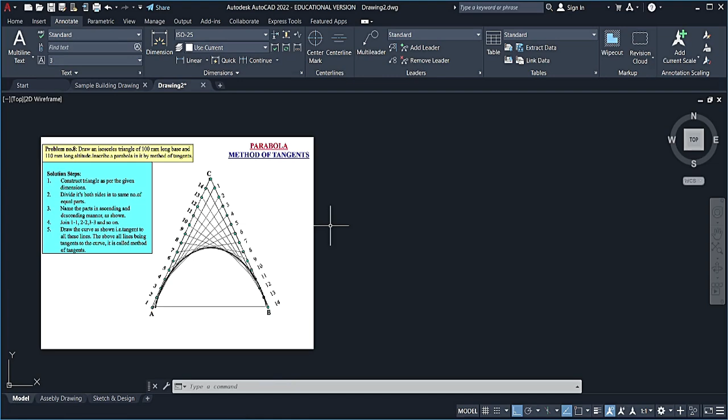Hi, so in this video I'll be showing you how to create or construct a parabola using the method of tangents. Now here to my left I have the questions for this task. It reads that you are required to draw an isosceles triangle of 100 millimeter base and 110 millimeter altitude. We are to inscribe a parabola using this method. Now here I have the steps and procedure on my left to create this parabola.

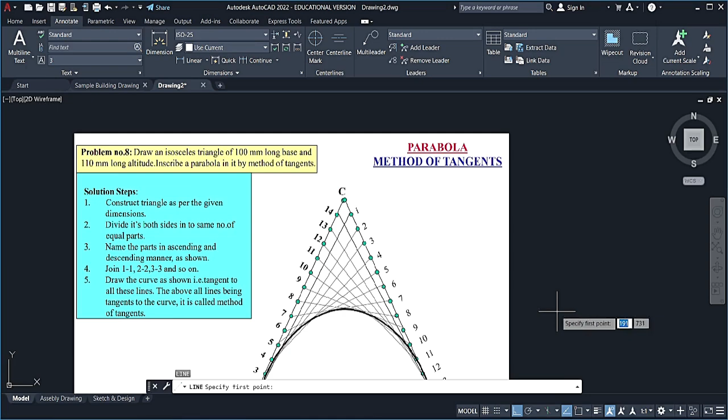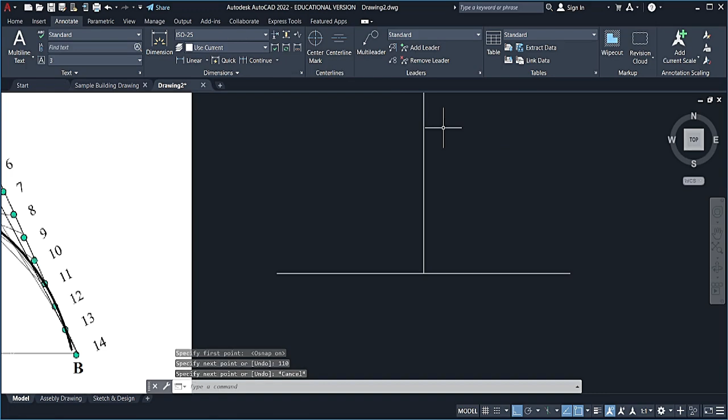Now step one for me is to start off with the triangle. So I'm just going to draw a horizontal line that measures 100. Then I'm going to draw a vertical line that measures the altitude, which is 110 millimeters, from the center. That's right here, 110. Now once I've done so, I'm simply going to draw a line through these points, from here to here and then back down to here. Now this one did not snap at the right location, so I'm moving it to where it's supposed to be.

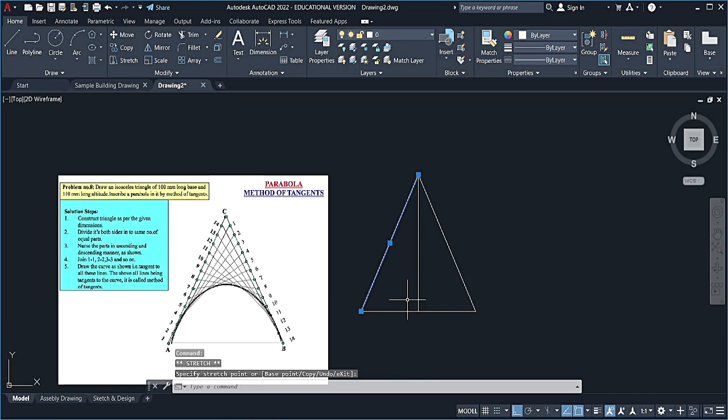Now I'm going to label my points using my text tool here. Click, draw my little text box. Now this letter is going to be C. Click out here. Now it's a bit small, so I'm going to increase it by doubling the size. I'm just going to scale it by 2, and then I'm going to place it where it needs to be, which is right about here.

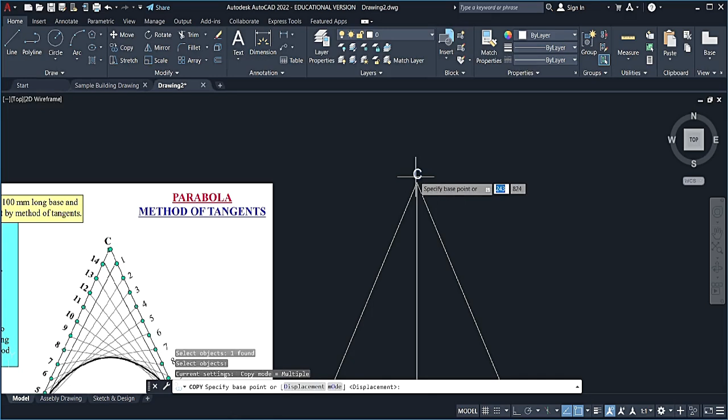Now once I have that letter in place, I'm going to copy this letter and place it at either corner of my triangle, and then I'm going to rename these 2 points. So this one will be called A and this one over here will be called B. Alright, once I've done so, the next step is to remove this line here in the middle. I have no further use for it.

I'm then going to divide line AC into a number of equal parts and line BC into the same number of equal parts. Now to my left, they have divided this line into 14, so that's what I'm going to do here. So I'm going to activate my divide command. So div, enter. I'm going to click on this line here and then enter 14. Now if you're not seeing the point, it means that you need to edit your point type, because once you have activated the divide command, clicked on the line and entered the number of divisions, you should see the line divided into portions.

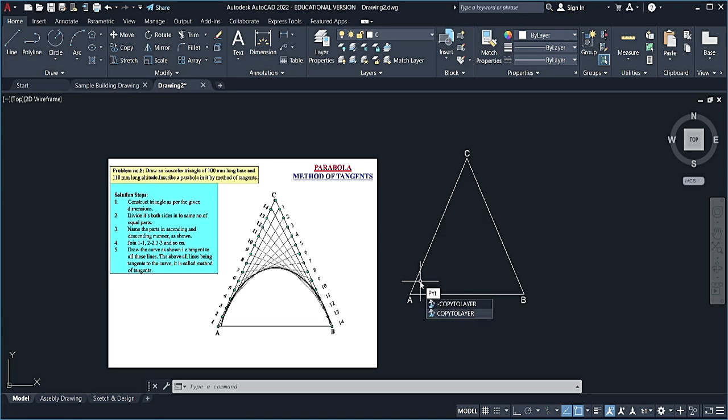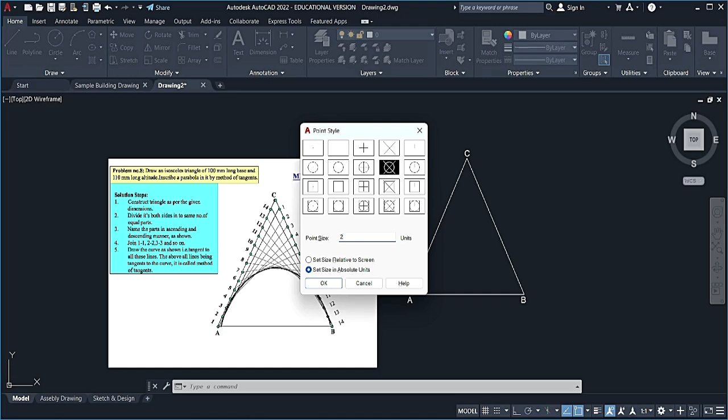Now if you're not seeing this, I want you to type this command: PT for point type, and press enter. The reason why we weren't seeing it is because it's currently selected as a dot, so we're going to change it to something else. You could choose any one of these here. I'm going to choose this one. I'm then going to change this from relative to absolute and reduce this number to about 2. Now we're able to see our division points.

Alright, so let me go ahead and select these 2 lines here, and I'm going to place them on another layer, just a layer so you can see them.

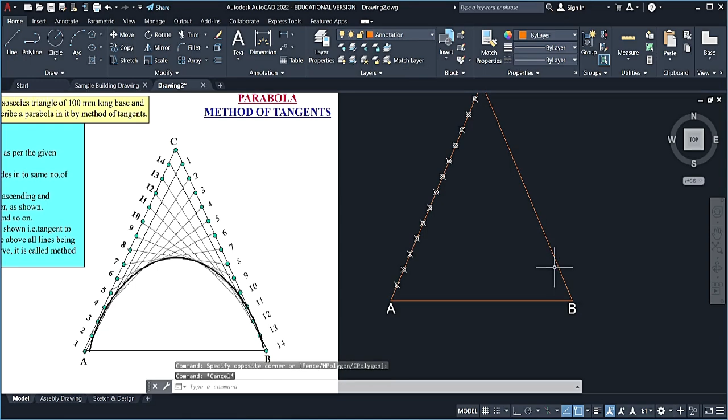Let's just work with the annotation layer. Now I'm going to divide this line here, line CB over here, into the same number of divisions. So div is the command, enter, click on the line, then enter the number of divisions. I think I entered 14.

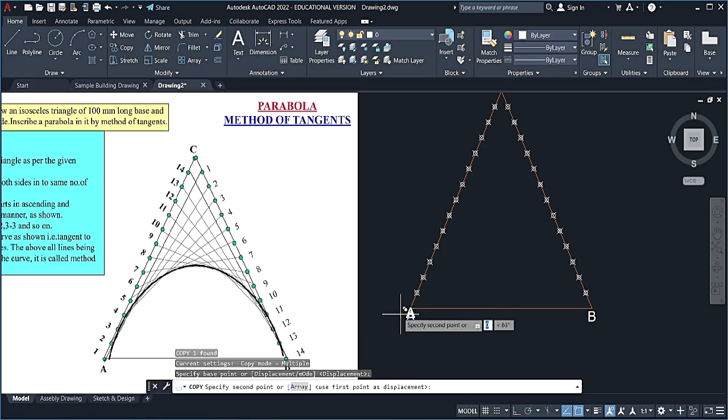Alright, now we have to label these points. Now you could use these letters here to label them. I'm going to copy this one here and place it right here. I'm then going to rename this one number 1. Let me reduce the text size from 5 to 2. Click on the outside like that, then place it where it needs to be, right here. Let me reduce the size of this text box.

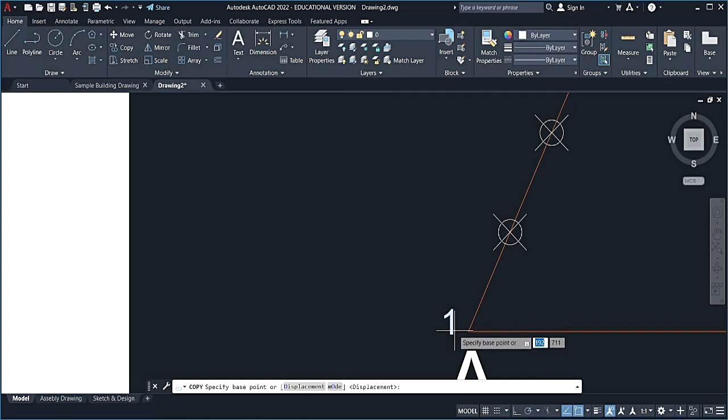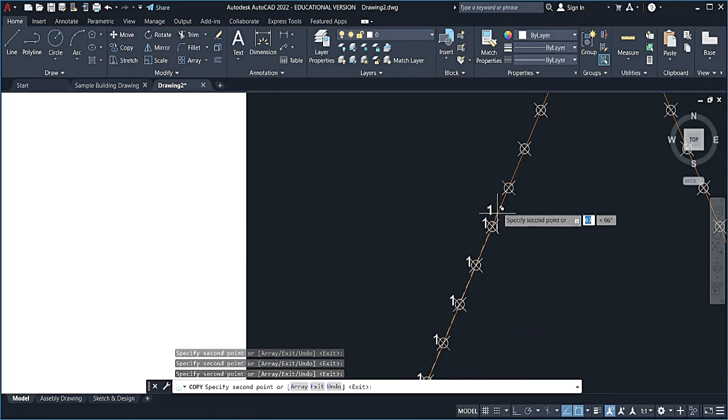Now once I've done so, I'm going to copy this text. I'm going to place it at the respective division points. Now if you're not able to snap to these points, please ensure that your OSnap feature known as node is turned on. And now you'll be able to select these points here. Alright, so you just go through and select those points. Once you have done all of them, the next step is that you're going to label the division points.

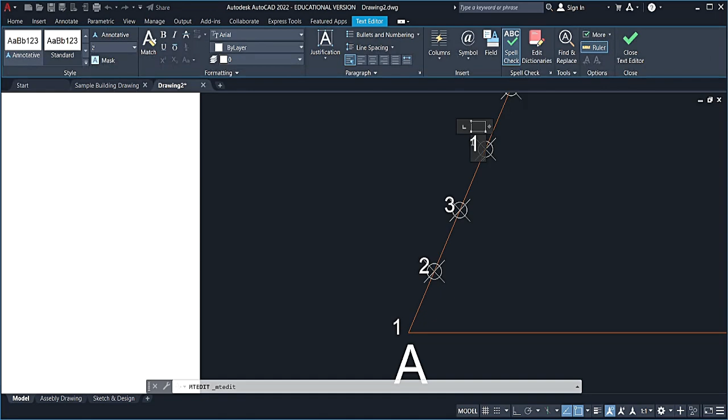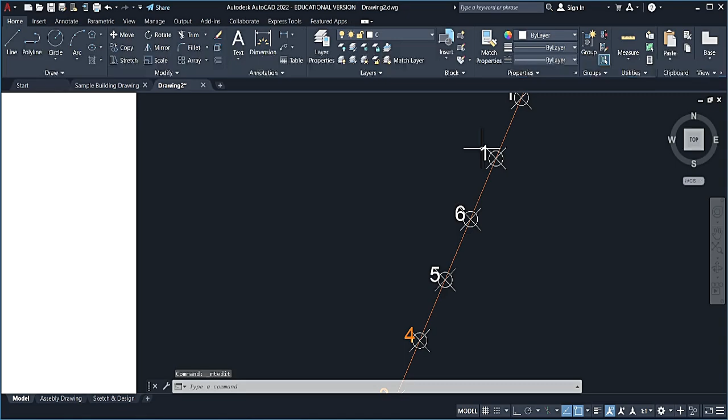Alright, so this is 1. Double tap, remove what's inside and label that one 2. This one here 3. This one here that's 4. And you make your way up the ladder. All of these should be on my annotation layer. Alright, let's continue. We're now at 5. Double tap, 6 here as well. 7. We're halfway there.

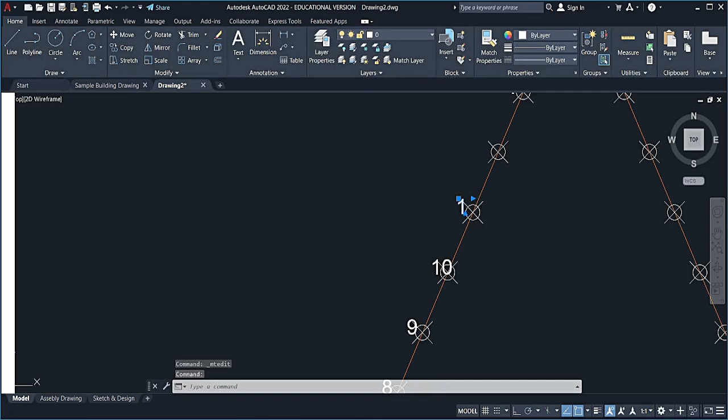This one here 8. 9. 10. 11. Now at number 12, and then this one will be 13, and then we have 14 right here. Let me copy this text here to there and make it 12. Alright, double tap. This number is now 12.

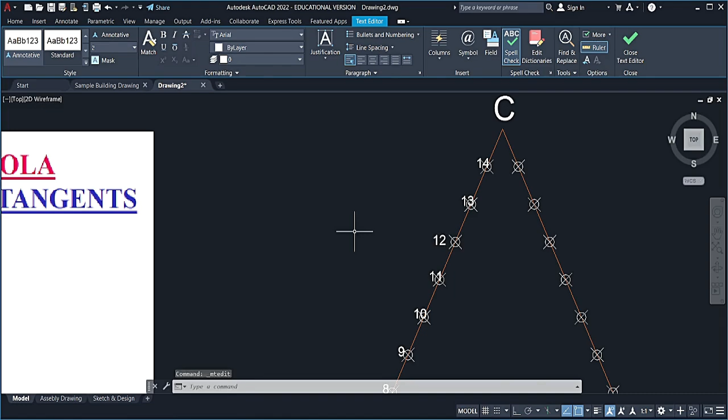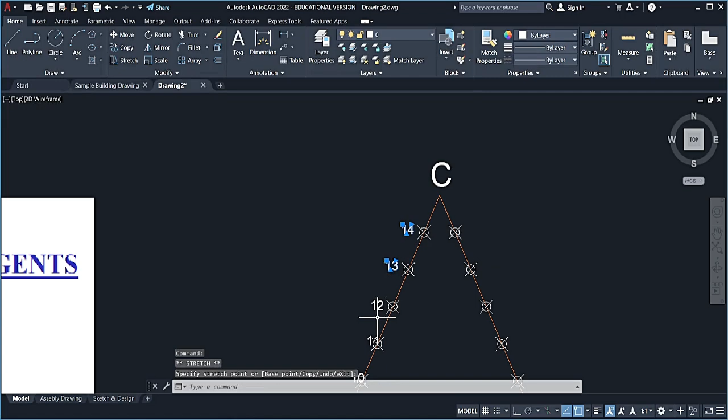Alright, now if you started at 1 over here and 1 is at the base at A here, you're now going to switch things around. So this one up here will now become 14, and this 14 up here will come down here to make this one 14 at B, and then number 1 will move from down here to up here. Alright, so 14, let me move it over a bit, this 13 as well, and my 11, and my 10. Alright, let's just move them over a bit.

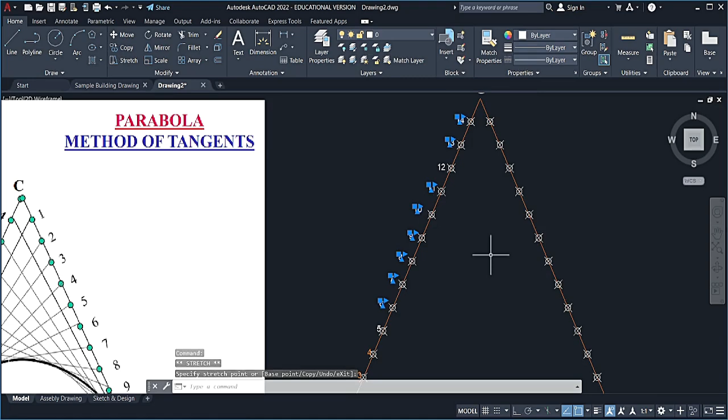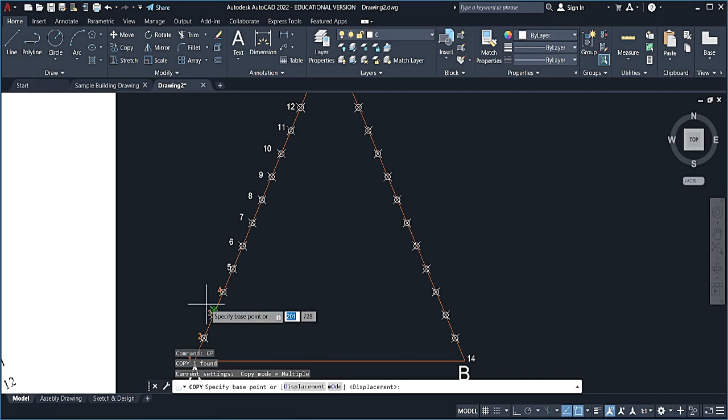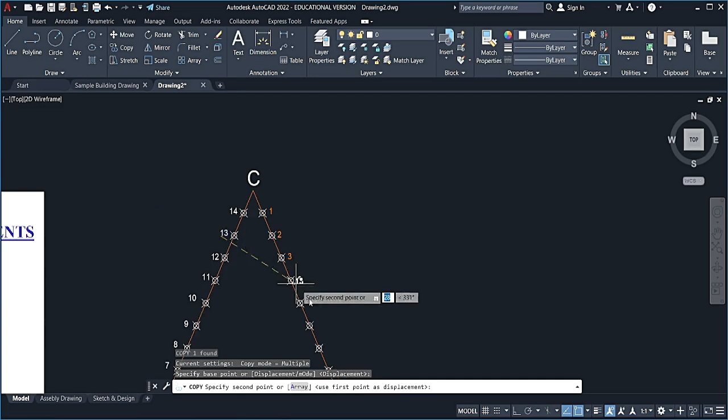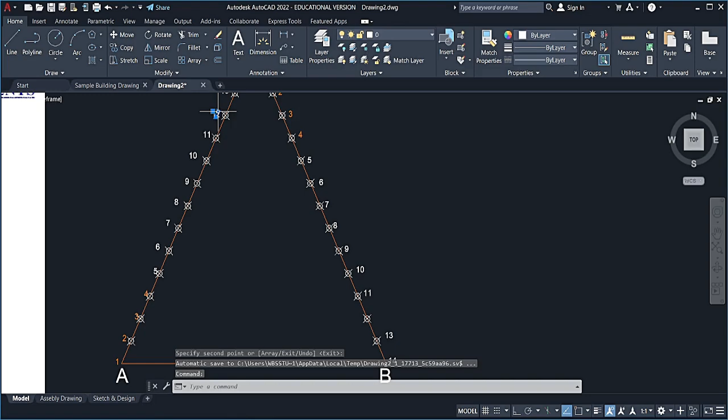And we're continuing. So we have 3, 4, then we're at 5, we're at 6, we're at 7. Alright, now at number 8, number 9, number 10, 11, 12. Alright. Once those are in place, it's now time for us to start doing some connection.

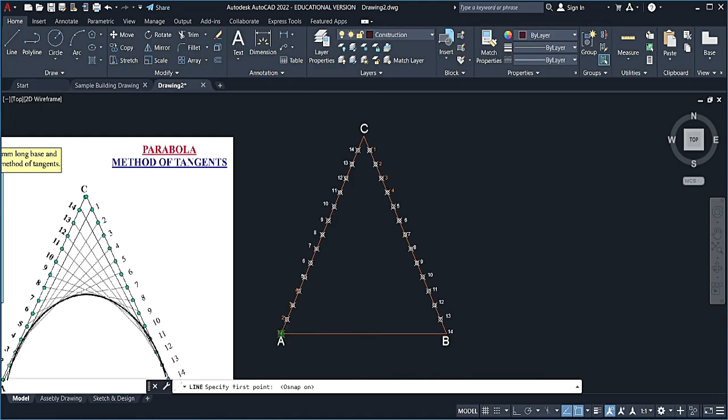So what we're going to do is draw construction lines, so we're basically matching the lines to each other. So we're going to connect point 1 right here to point 1 up here. Then we're going to attach point 2 to point 2 over here. And you get the drift. Point 3 to point 3 up here. Point 4 to point 4. Point 5 to point 5. Point 6 to point 6. Point 7 to point 7.

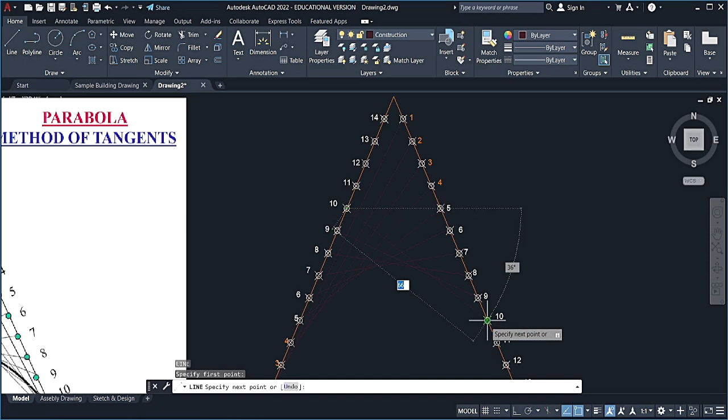Point 8 to point 8. Alright. Point 9 to point 9. Point 10 to point 10. Point 11 to point 11. Point 12 to point 12. And point 13 to point 13. And then finally point 14 to point 14 right here.

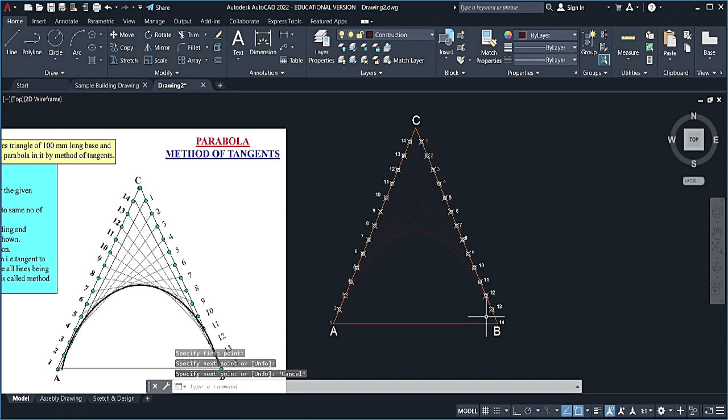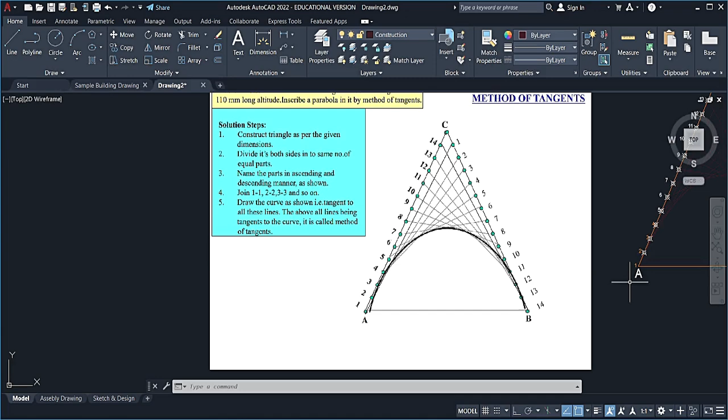Alright, now here is the intricate part. So after we've joined 1 to 1, 2 to 2, 3 to 3, and so on, we're now going to draw the curve as shown, tangent to the lines, in a tangential format, so that all the lines are basically above the curve that we're creating now. Alright, so basically what we're doing here, I want you to look at this here.

So what is basically happening, it will be similar to how you did the previous parabola, where you're simply matching up the lines. Alright, so once you have completed connecting all the lines together, it's now time for us to draw the parabolic curve. So we're going to go here and then activate our spline tool. Then we're going to start at point A.

Alright, now the points that we're going to be connecting, I might just add some points to those locations. I'm going to do that. And let me change the color of the points so that they kind of match up here. Yeah, so I'm going to make them yellow. Now it's basically like this.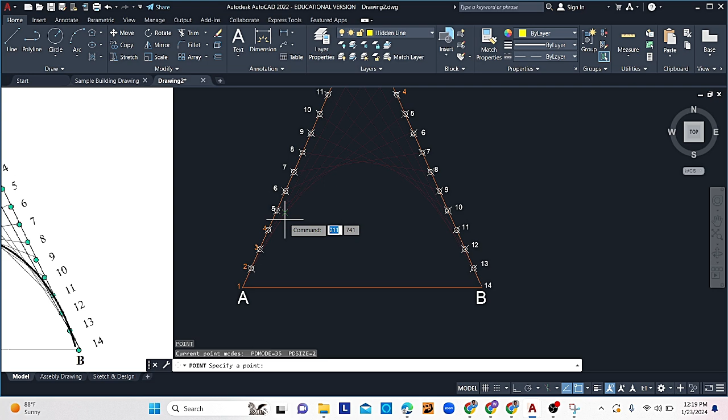You're trying to create a curve that is pretty much on the lower end, or the lowest sides of these lines that we drew. So what we're going to use as our point is going to be, for example, point 1 here. That's 1 point. Then we're going to look where the lowest intersection is. So wherever the lines intersect, that is closest to the inner sides of the hollow section here. That closest location is right here. Alright, the next one is at this location right here, not the one behind but the one in front.

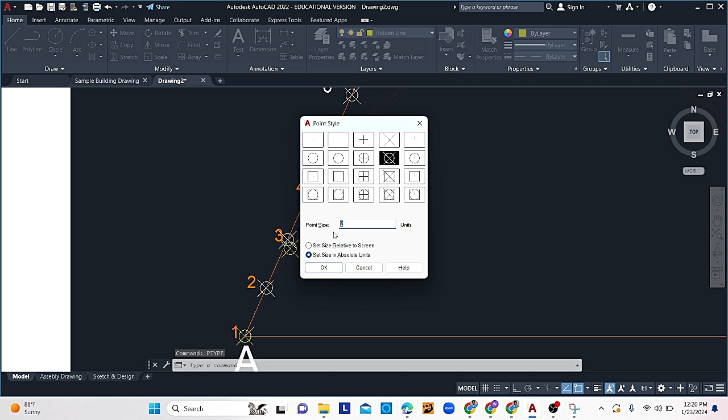Let me change my point type to a smaller point. PT, enter. Let me change it from 2 to 1. Alright, the next point is going to be at wherever there is the closest intersection. There is one here, which is the closest one to the inside here.

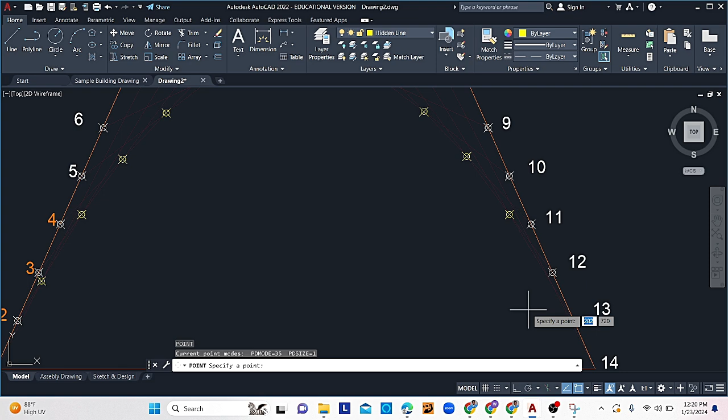Alright, next one would be right here, not the ones behind it, but the one that is closest to the opening right here. Then here, then next one would be here, then we have here, here, here, here, not the one behind but the one closest to the opening. We have one here, we have one here, one somewhere along here, and then finally we go down to 14 right there.

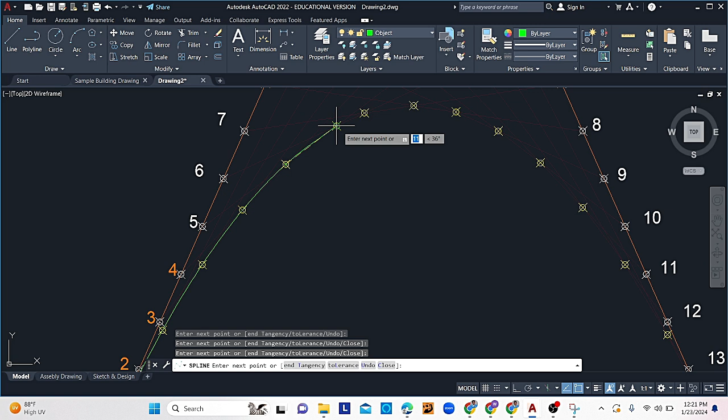So now we can draw our parabolic curve through those points. So we're going to go to our spline tool here, activate that, and let's make our way through. So we're at number 1 now. Then we're going to the first yellow point right there, second yellow point, third, making our way all the way around, and you're starting to see a curve starting to form. This is our parabolic curve using this method. Alright, now there you go.

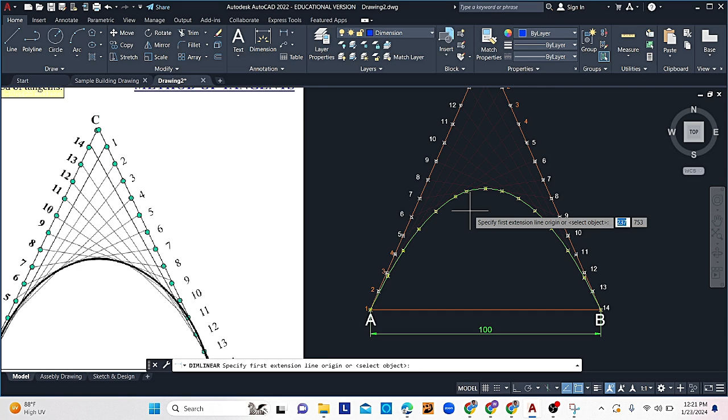Enter. Now remember the dimensions you're drawing. What dimensions are you capturing? The dimensions that were given. So the width or the base, and you're capturing the altitude of the triangle as well. Alright, so let's place this on our dimension layer.

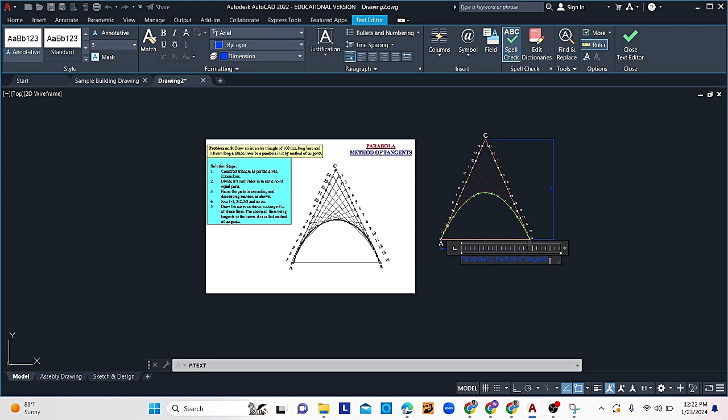We're also going to add the title underneath. Alright, so the title, using our text tool here, is going to be Parabola by method of tangents. Alright, then you can open this out, click. Now this is a bit too small, so let's increase the text size to 5.

Now it's just a matter of us positioning our annotation. Double tap on that. I'm going to press enter to go down here, and I'm going to write the word scale, and this has to do with the scale that I drew my drawing, and the scale is going to be 1 to 1. I'm going to center it to my right, so that it's like that. Then I simply move this over a bit like this, so that things line up.

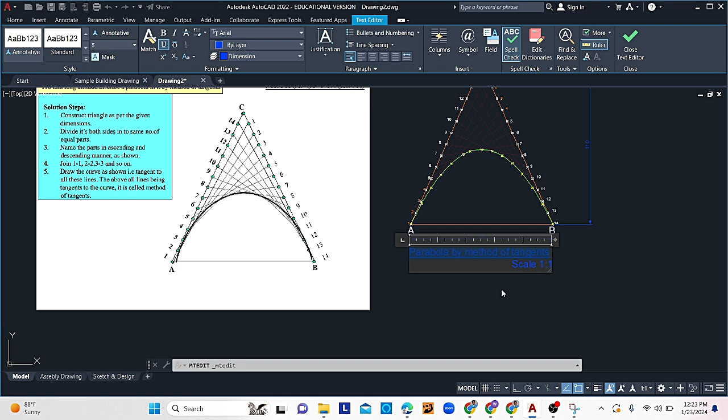I'm also going to go a step further, and I'm going to underline by clicking on the U with the underline symbol under it to underline the name here. Now this is going to be on my dimension layer, and there you go. This is the parabola via the method of tangents.